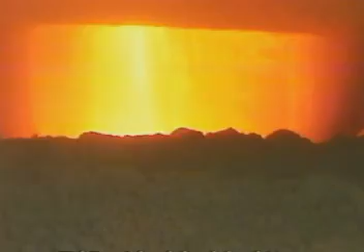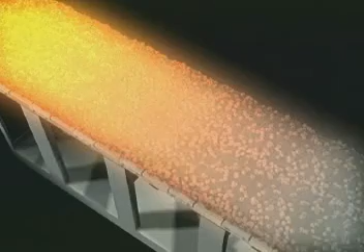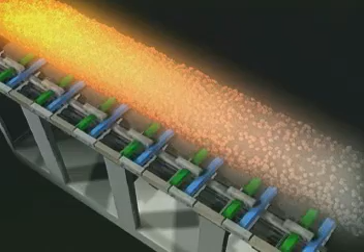For modern pyroprocessing systems, the clinker cooler offers the greatest development potential for further reducing specific heat consumption. For the past 10 to 15 years, air beam technologies have capitalized on this development potential. However, this capitalization has not been without added complexity in terms of air piping, dampers, and sealing air fans. Recognizing that these side effects may have an impact on the cooler's overall availability, F.L. Smidth and Fuller set out to develop a cooler that was less complicated, more efficient, and easier to maintain than any other cooler on the market. The result of this intensive development effort is the Smidth-Fuller Cross-Bar Cooler.

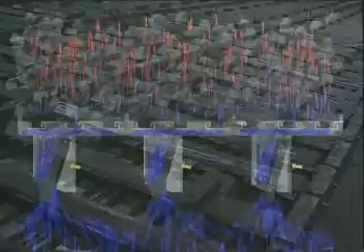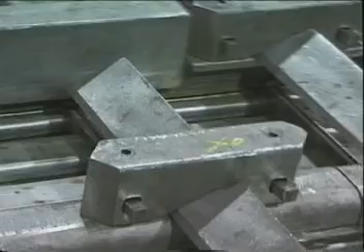Simplicity is the hallmark of the new cooler. Operation and maintenance of this cooler are so simple that increased availability of the kiln system is a natural development. The SF cooler is fundamentally different compared to any other clinker cooler in that the two primary functions of the cooler have been separated: conveying the clinker and cooling the clinker.

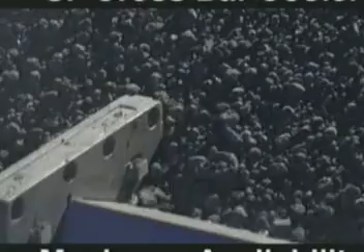The grate line performs no conveying function. It is completely stationary. There are no moving grates. Rather, a simple series of reciprocating crossbars located above the grate line are used to convey the clinker. These crossbars are separated from the grate line components by a protective layer of stationary clinker. By separating the conveying mechanism from the cooling mechanism, cooling efficiency no longer deteriorates over time, and the sealing air fans that are required for air beam coolers are completely avoided.

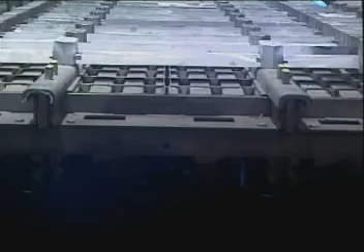The crossbars effectively convey, mix, and shear the clinker layer. This has the dual effect of conveying the clinker while at the same time preparing it for its efficient exposure to cooling air.

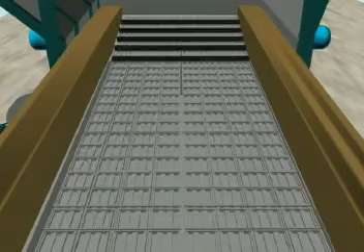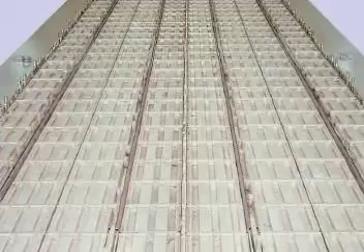Beneath the crossbars is a grate line with individual air distribution plates that are locked together to prevent the possibility for clinker fall-through. With these air distribution plates, an innovative cooling process has been introduced which is amazingly simple, while at the same time remarkably efficient.

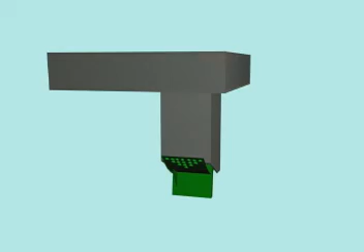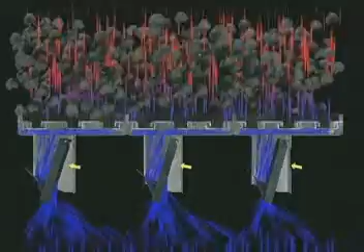On the bottom of each individual cooling plate is a rectangular tower. The tower assembly of each cooling plate contains a weighted regulator. The regulator consists of a special valve which hangs from the tower. The hanging valve acts as a variable orifice that moves relative to the difference in pressure on either side of the valve.

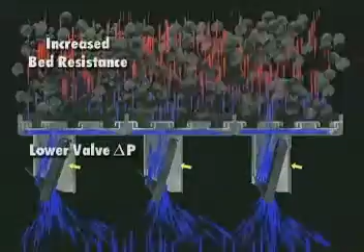Because the pressure immediately below the air distribution plate is a measure of the resistance of the material layer above it, the regulator opens to compensate for an increase in the measured resistance, or closes to compensate for a decrease in the measured resistance.

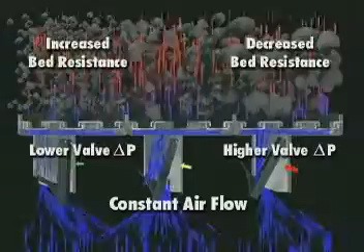The regulators are specially designed to maintain a constant airflow through the cooling plate and into the clinker layer, irrespective of process conditions such as bed height, particle size distribution, temperature, and so on. In this way, every grate plate in the cooler is continuously provided with the quantity of cooling air that it needs. The regulator maintains a specific airflow rate throughout its entire range of movement.

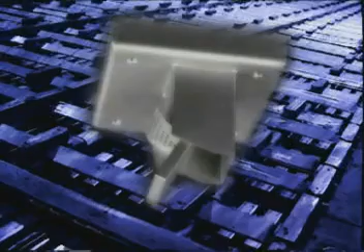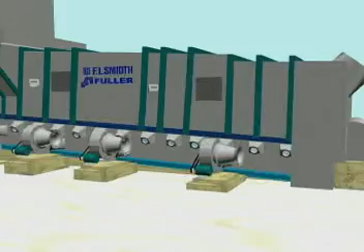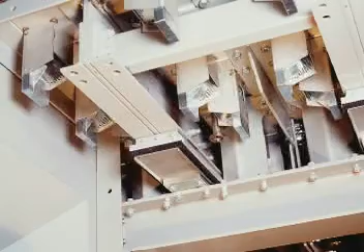By carefully selecting the weight and flow pattern of the individual valve that hangs from each of the towers, a constant flow rate is attained. The efficiency of the cooler can, therefore, be optimized by installing different flow regulators at different positions within the grate area of the cooler. The regulator, thus, controls the amount of cooling air that flows from the undergrate chamber into each individual grate plate. It is like having an individual cooling fan for every grate plate in the cooler.

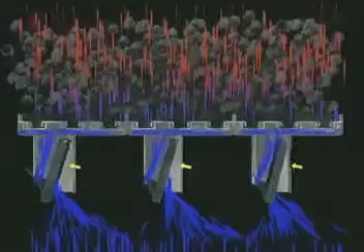The use of the mechanical flow regulator greatly simplifies the operation of the cooler. There are no pipes, dampers, or sophisticated electrical controls for the operator to be concerned with. The mechanical flow regulators ensure optimum air distribution during all operational occurrences. As a result, the thermal efficiency of the SF cooler has been demonstrated to be superior to any other type of clinker cooler, including the most efficient of air beam coolers.

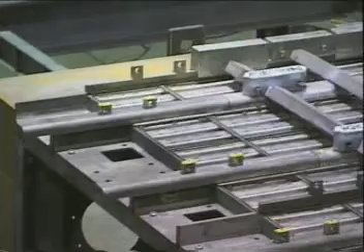The air distribution plates are protected from heat and wear in two important ways. First, the plates do not move, so they are not subject to moving wear. Second, there will always be an insulating layer of clinker located between the active bed of clinker and the air distribution plates themselves.

The grate line is completely stationary so that the use of side castings and side seals are completely avoided. The grate plates themselves are no longer considered wear parts, and no refractory ever needs to be disturbed to replace a grate plate.

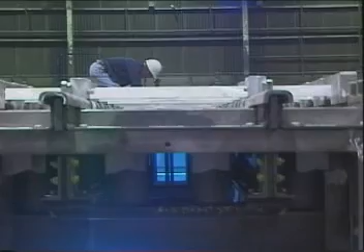The sealing system for the grate line is so effective that no devices are provided for removal of spillage from the undergrate chamber. The bottom of the undergrate chamber has a steel floor without any openings. No spillage removal valves are provided, and no spillage conveyor is required. This means less items for maintenance.

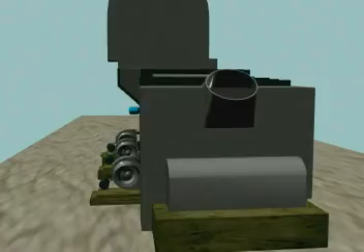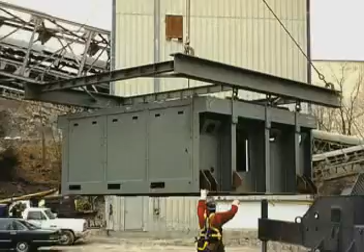The fixed grate line for the entire cooler makes it possible to construct the entire cooler out of several pre-engineered, pre-assembled modules. In fact, the entire SF cooler is constructed as a modular system, with one controlled flow inlet system, followed by several standard modules. Individual modules are 4 cooling plates wide and 14 cooling plates long.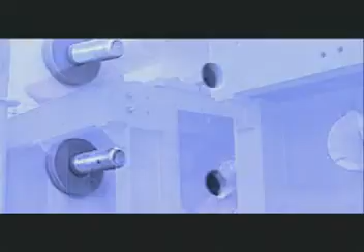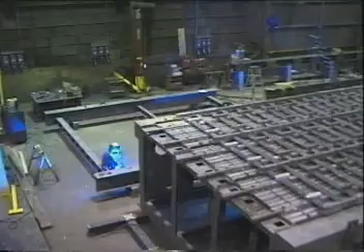The modular design allows for different configuration patterns depending upon the production level and clinker temperature requirements. Individual modules are simply set side by side and end to end. The standard modules are pre-assembled in the workshop to ensure high quality, swift and easy installation. In fact, entire coolers will be stocked as off-the-shelf items.

For retrofit applications, complete demolition of the existing cooler and startup of the new cooler can typically take place in as little as 25 days.

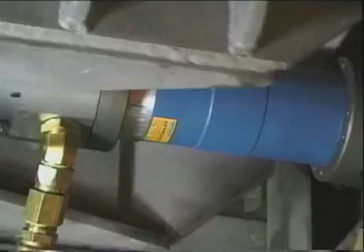Each module consists of a movable frame activated by a hydraulic cylinder. The movable frame is connected to a pair of drive plates which reciprocate the moving crossbars. The movable frame is much simpler in both design and construction than a conventional movable frame. It does not support the grate plates or the grate plate supports. It supports only the drive plates to which the movable crossbars are attached.

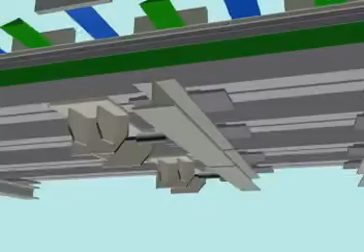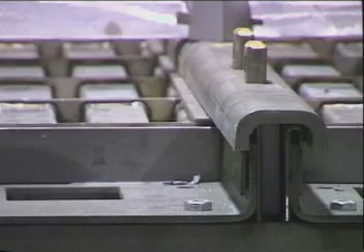The drive plate penetrates the grate line via 2 slots which extend throughout the entire module length. On top of the drive plates, a patented sealing profile forms a dust trap, preventing clinker from entering the undergrate compartment. Since the grate plates do not move, it is possible to make a very effective seal between the fixed grates and the moving drive plate.

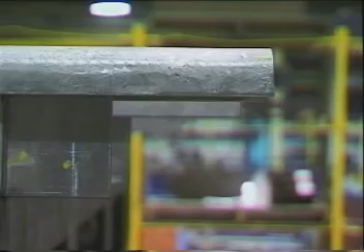The sealing profiles extend throughout the entire cooler length, which means that during the reciprocating movement of the crossbars, the ends of the drive plates are never exposed to wear by the clinker.

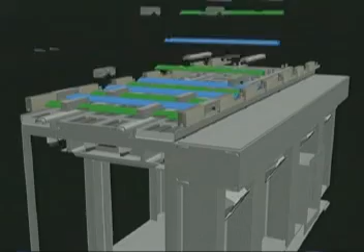Each module has 7 stationary crossbars and 7 movable crossbars, which reciprocate in a manner similar to grate plates in a conventional cooler. The crossbars are attached to the drive plate by a retainer bracket that attaches to ears extending from the drive plate.

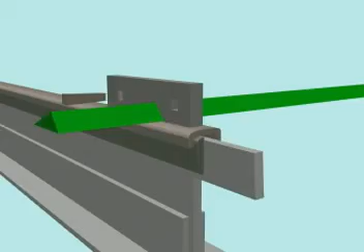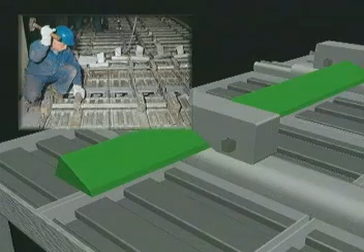The retainer bracket and crossbars are locked by wedges driven in by hammer. Replacement of the crossbar is simply made by knocking the wedges out with a hammer and removing the retainer bracket. The number of wear parts has been minimized through simple design.

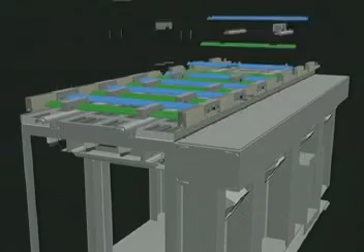These wear components are designed to last 1 campaign or more. All wear parts in the cooler are easily replaced, typically in less than 2 days.

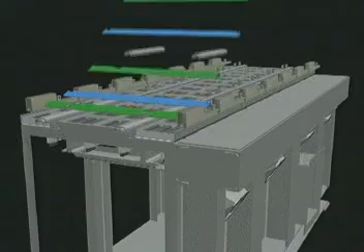Cooling air is supplied to the undergrate chamber of each module by fans equipped with piezometers. The mechanical flow regulators are so effective that the required number of fans is only determined by the number of modules set end to end. That is, modules set side by side have their undergrate chambers joined so that only one fan supplies air to both the right and left.

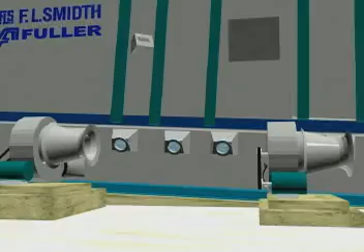In this way, a 4,000 ton per day cooler, for example, will only have a total of 6 cooling fans, one for each of the 5 modules in length, plus 1 fan for the controlled flow inlet module.

In conclusion, the SF cooler is significantly more simple to operate than an air beam cooler. The use of mechanical flow regulators is like having a separate cooling fan with its own flow control for every grate plate in the cooler. As a result, there are inherently less items for the operator to control.

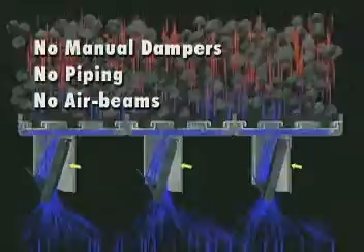Manual dampers and internal piping associated with air beam systems are completely avoided. Moreover, the separate sealing air fans required by such systems are no longer required. The mechanical flow regulators are self-regulating, so sophisticated controls are not required, and inherently fewer fans are needed.

In addition, the SF cooler is significantly more simple to maintain than a traditional cooler. By separating the conveying and cooling mechanisms, it is possible to employ a fixed grate line for the entire cooler. Simple replacement of all wear components yields less downtime for your kiln system.

In summary, there is good reason to believe that the crossbar cooler will define the way that clinker coolers are installed, operated, and maintained in the future.